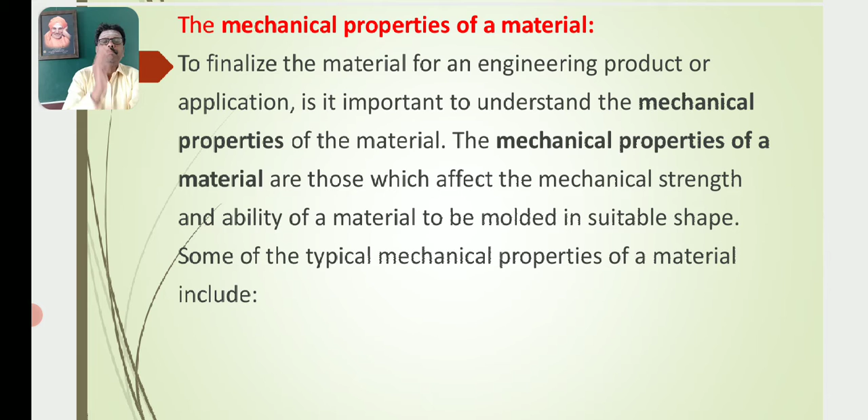What we know is that for an engineering product or application, we must study the mechanical properties of a material. That means to finalize the material of an engineering product or application, it is important to understand the mechanical properties of the materials.

The mechanical properties of a material are those which affect the mechanical strength and ability of a material to be molded in a suitable shape. So what we use in our regular life, some of the engineering equipment or instruments, are all made based on their properties or characteristics, so-called engineering design. So for the purpose of engineering design or engineering applications for various fields, we must study the mechanical properties of the materials.

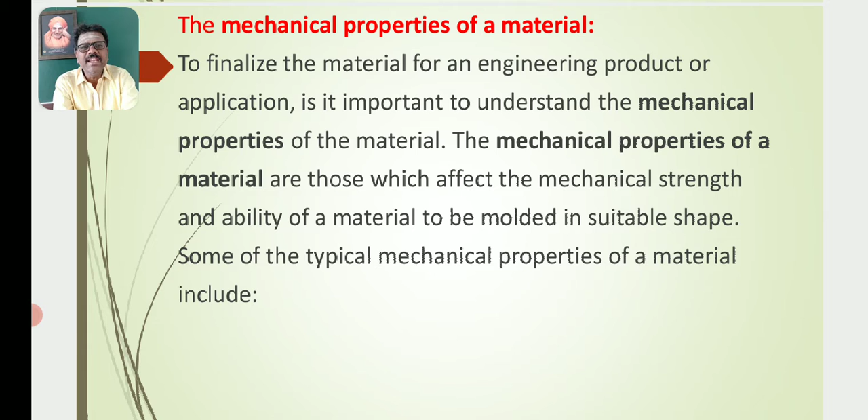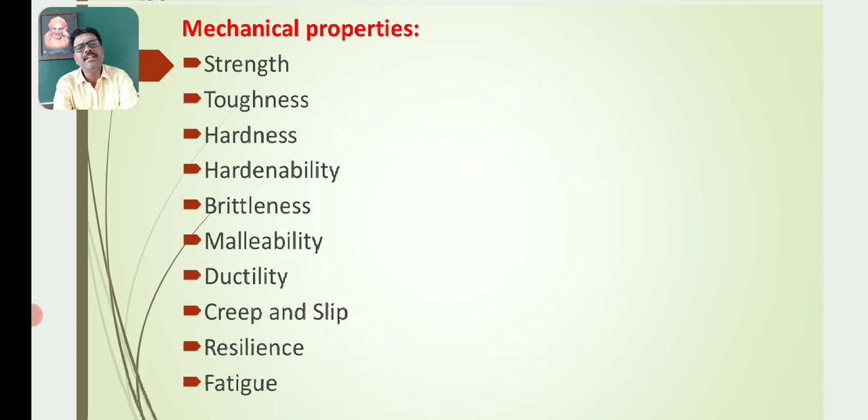So here are given some of the mechanical properties of the materials: strength, toughness, hardness, hardenability, brittleness, malleability, ductility, creep and slip, resilience, fatigue. So these are some of the mechanical properties of the material we need for designing various engineering products or applications.

So now let us discuss material fatigue. What is material fatigue? What are the different types of fatigue? How can fatigue be reduced? What are the different tests of fatigue and all those things? So material fatigue is a phenomenon where structures fail when subjected to a cyclic load.

Suppose the object or any engineering product is subjected to cyclic load, cyclic stress, cyclic external forces; then the engineering product fails to perform its function after several cycles of load or stress or external forces. This type of structural damage occurs even when the experienced stress range is far below the static material strength.

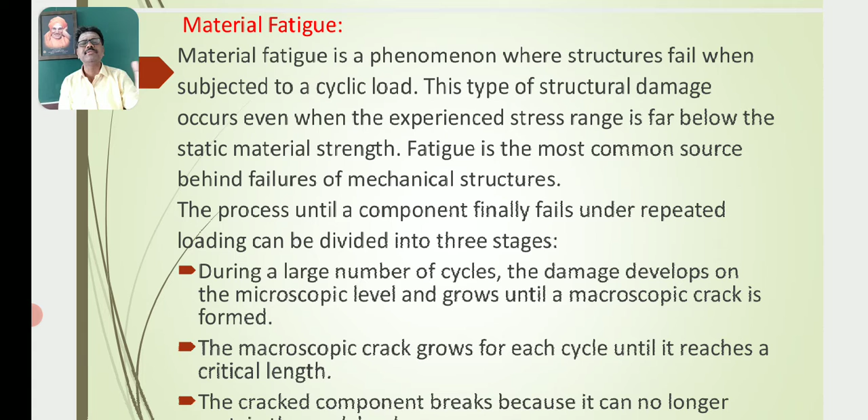So a crack, initially microscopic in level, grows up and becomes a macroscopic crack. Further, the macroscopic crack grows for each cycle until it reaches a critical length; its length goes on increasing. Then the third stage: the cracked component breaks because it can no longer sustain the peak load.

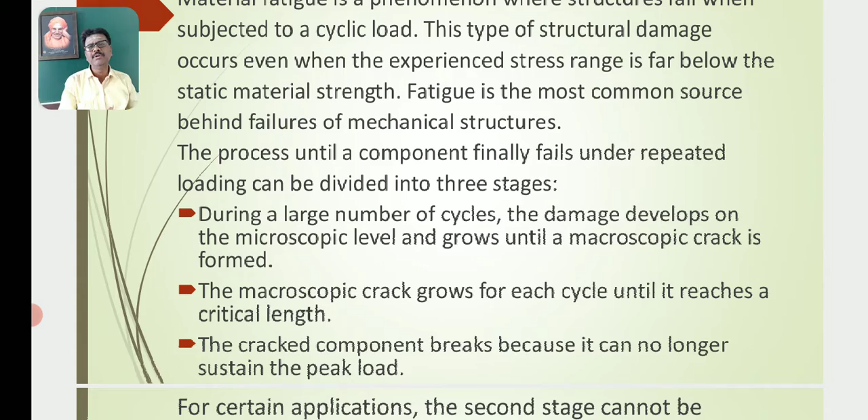So first step, the microscopic level, then it further develops to the macroscopic stage, then the macroscopic crack grows for each cycle until it reaches a critical length. Then further, the cracked component breaks because it can no longer sustain the peak load. So this is how fatigue occurs from the initial stage to the final stage, which has three important stages.

For certain applications, the second stage cannot be observed. A microscopic crack instead grows rapidly, causing sudden failure of the component. So in some cases, in case of some mechanical engines, the second stage cannot be observed because a microscopic crack instead grows rapidly, causing sudden failure of the component.

The details of the last two stages are usually considered within the topic of fracture mechanics. The term fatigue applies mainly to the first stage. There is, however, some overlap between the disciplines, and the measured number of cycles to fatigue often includes the last two stages as well, because the largest part of the component's life is spent before it is possible to observe a macroscopic crack.

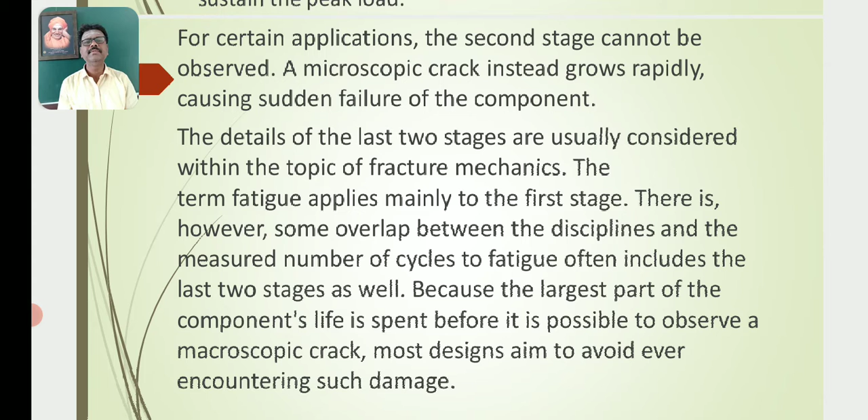Most designs aim to avoid encountering such damage, that means the number of cyclic loads or cyclic stresses which causes fatigue, which causes a macroscopic crack.

So here are given some of the things about fatigue. It is a type of damage or failure in the materials. Fatigue means it is a type of damage or failure in the materials or in some mechanical engines, some mechanical equipments, and so on, which is caused by fluctuating or cyclic stresses.

Usually the macroscopic crack is caused due to cyclic load, cyclic stresses, cyclic external forces acting on it, fluctuating the part of the engine. So because of that, fatigue is caused by fluctuating or cyclic stresses.

Under the effect of fluctuating stress, a point comes where the material is fractured. This level of stress is called fatigue stress and failure is called fatigue failure. Under the effect of fluctuating stress or cyclic stresses, a point comes where the material is fractured. That means this level of stress is called a fatigue stress, and failure is called fatigue failure. This is the third concept related to fatigue.

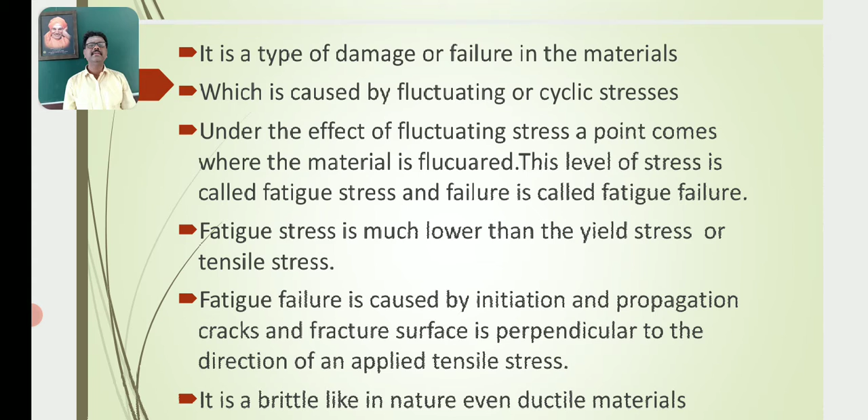So then it is brittle-like in nature, even in ductile materials. Brittle and ductile materials can be studied in the next class. Ductile fracture means the fracture caused after a plastic deformation. The body exhibits the elastic property up to a certain maximum stress. Beyond that point, the body exhibits the property of plasticity. Under that condition, the fracture caused after plastic deformation is known as a ductile fracture.

Brittle fracture means the fracture caused without any appreciable plastic deformation. That is the difference between ductile fracture and brittle fracture. Then in a cyclic process, three different stress-time modes are possible. The stress can be axial, tension-compression, bending or torsional in nature.

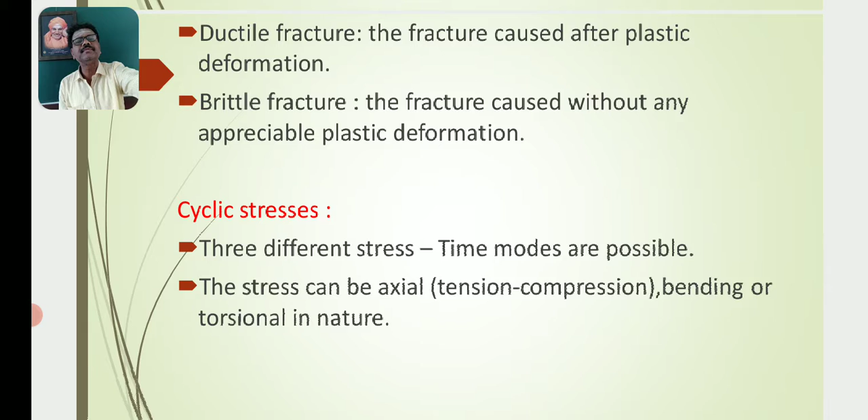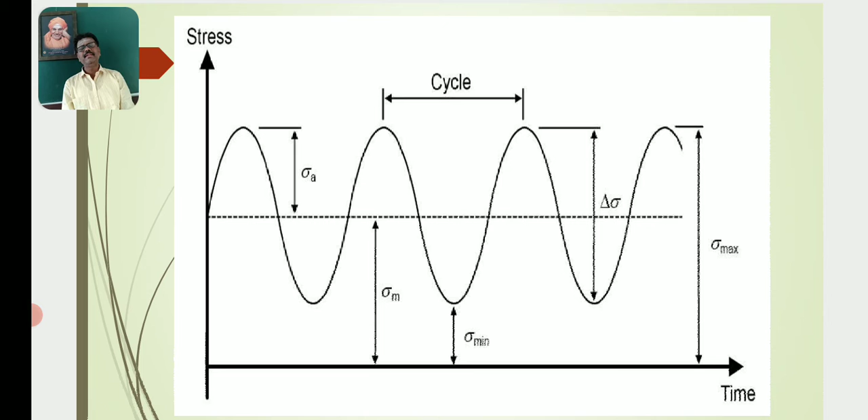So you see the stress versus time graph, that is the sinusoidal graph that indicates the cyclic load or stress or external forces acting on the material, where sigma max indicates the maximum stress acting on the surface, sigma min indicates the minimum stress acting on the surface. Sigma maximum means the maximum cyclic stress or maximum cyclic load acting on the surface of the material, sigma minimum indicates the minimum stress acting on the surface.

So reversed stress cycle. Tensile stress applied on a sample and released, compressive stress applied and then released. For example, bending load applied to a rotating shaft, axle of vehicles. This is called a reversed stress cycle, type A mode. In this case, a tensile stress is applied on a sample and then released, then a compressive stress is applied, then again released. The bending load applied to a rotating shaft, axle of vehicles, are good examples of a reversed stress cycle.

Then a repeated stress cycle, this is called type B mode. The maxima and minima are asymmetrically related to the zero stress level. It is termed as a repeated stress cycle. For example, the cycling load or cycling stress on a cantilever beam, depending upon the residual stresses inside the materials. This is the example for a repeated stress cycle.

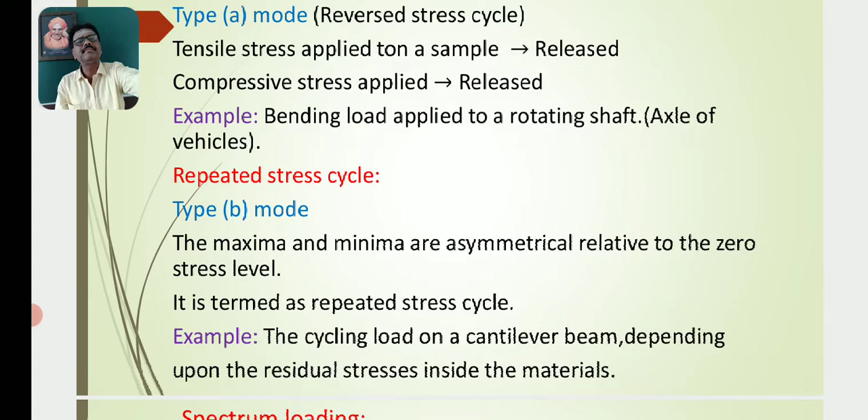Now third, type C mode, a spectrum loading. The stress level varies randomly in amplitude and frequency. That mode is called type C mode or spectrum loading. Example: suspension wires in a railroad bridge, where the stress changes randomly in amplitude and frequency. Wires carry the weight of the bridge under static tensile load, with additional load when a train is on the bridge.

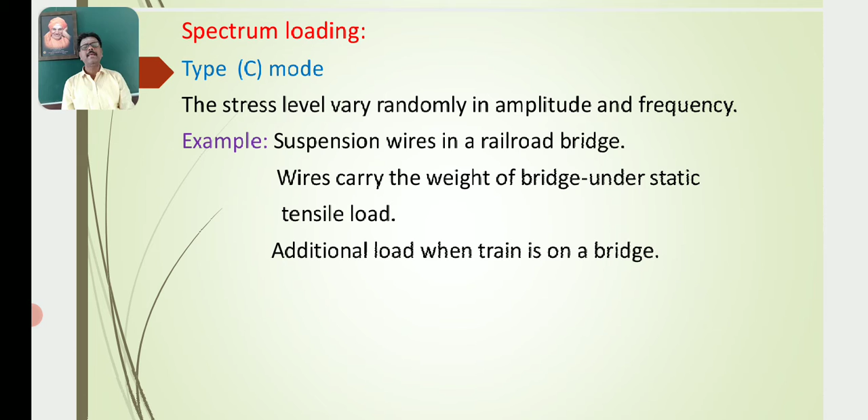So the suspension wires in a railroad bridge undergo cyclic stress, meaning the stress acting on the wires varies randomly in amplitude and frequency. Such a mode is called type C mode. That type of loading is called spectrum loading.

So now let us discuss the SN curve. The specimen is subjected to cyclic stress at a large maximum stress amplitude. This large maximum stress is usually taken as 2/3 of the static tensile strength. Finally, the number of cycles to failure is counted.

Then other specimens of the same material and dimensions are taken and subjected to the same procedure, but at progressively decreasing maximum stress amplitudes. Then data are plotted as stress S versus the logarithm of the number of cycles to failure for each specimen.

So here the SN curve means stress S versus the logarithm of the number of cycles of cyclic load or cyclic stress. Now the specimen is subjected to the cyclic stress or load at a large maximum stress amplitude. This large maximum stress is usually taken as 2/3 of the static tensile strength. Then finally the number of cycles to failure is counted.

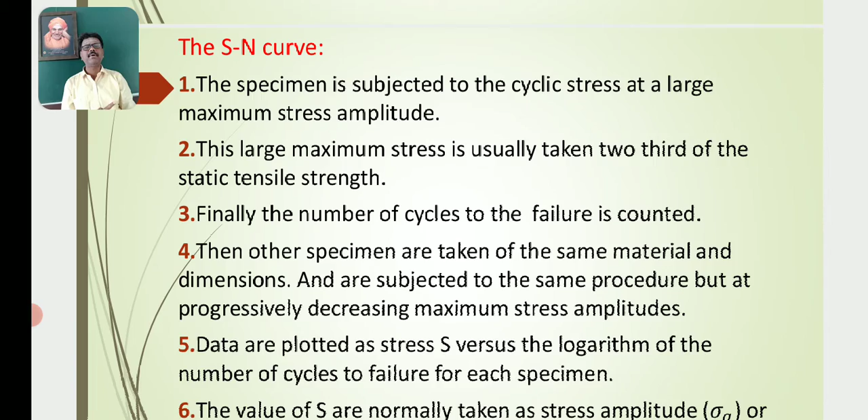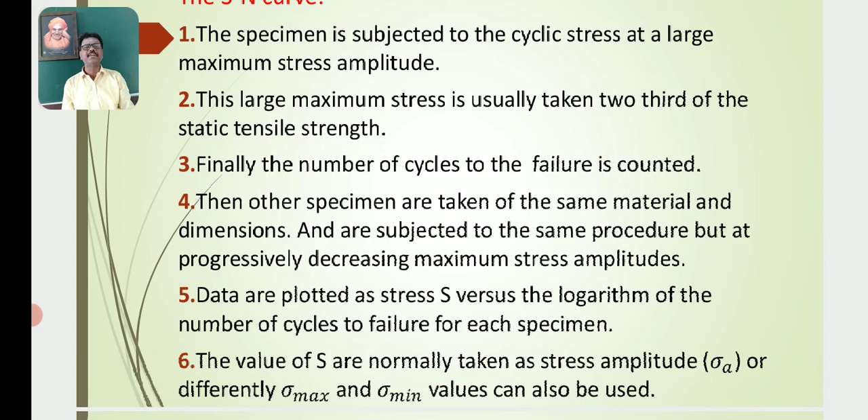Then other specimens of the same material and dimensions are taken and subjected to the same procedure, but at progressively decreasing maximum stress amplitudes. Then the data are plotted as stress S versus the logarithm of the number of cycles to failure for each specimen. The value of S is normally taken as the stress amplitude, or alternatively sigma maximum and sigma minimum values can also be used.

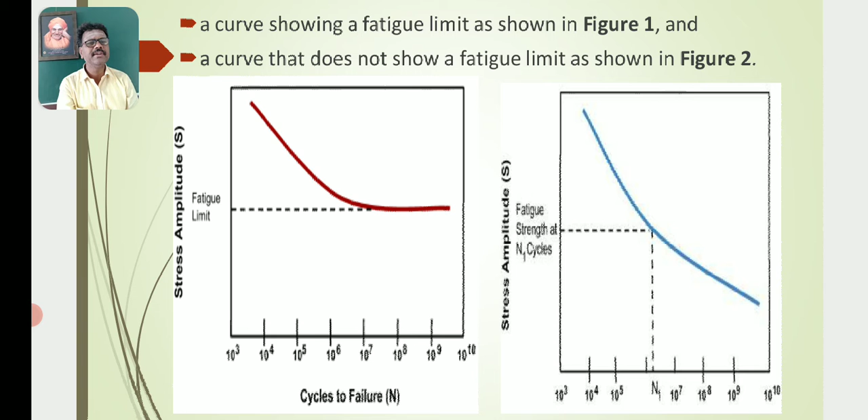Figure 1 indicates a curve showing a fatigue limit, and figure 2 a curve that does not show a fatigue limit, as shown in the second diagram. That means the variation of stress amplitude versus the number of cycles, or number of cyclic loads applied to the surface of the materials.

So then what are fatigue limits? For some ferrous and titanium alloys, the SN curve becomes horizontal at higher N values. This is called the fatigue limit or endurance limit. This fatigue limit actually represents the maximum value of cyclic stress below which fatigue will not occur for an infinite number of cycles.

So here fatigue limit means for some ferrous and titanium alloys, the SN curve becomes horizontal at higher N values. This is called the fatigue limit. Then what is the fatigue limit? The fatigue limit actually represents the maximum value of cyclic stress, or cyclic load or cyclic external force per unit area, below which fatigue will not occur for an infinite number of cycles.

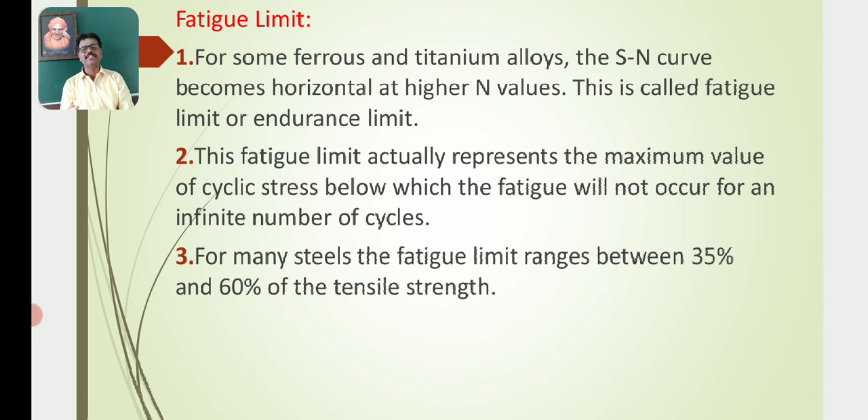For many steels, the fatigue limit ranges between 35% to 60% of the tensile strength. So here is the comparison between the fatigue limit and the tensile strength of the same material, with one example given, steel. For many steels, the fatigue limit ranges between 35% to 60% of tensile strength. So the fatigue limit range is different for different materials.

So now let us discuss fatigue strength. Many non-ferrous alloys like aluminium, copper, and magnesium do not have a fatigue limit. Their SN curve continues its downward trend with increasing number of cycles.

Thus fatigue is inevitable for these alloys regardless of the amplitude of the stress. The fatigue response of these materials is specified by fatigue strength. It is defined as the magnitude of the stress at which a failure will occur for some specified number of cycles.

Fatigue strength is defined as the magnitude of the stress at which failure will occur for some specified number of cycles. In case of non-ferrous alloys, the fatigue failure occurs when the number of cycles must be approximately equal to 10⁷.

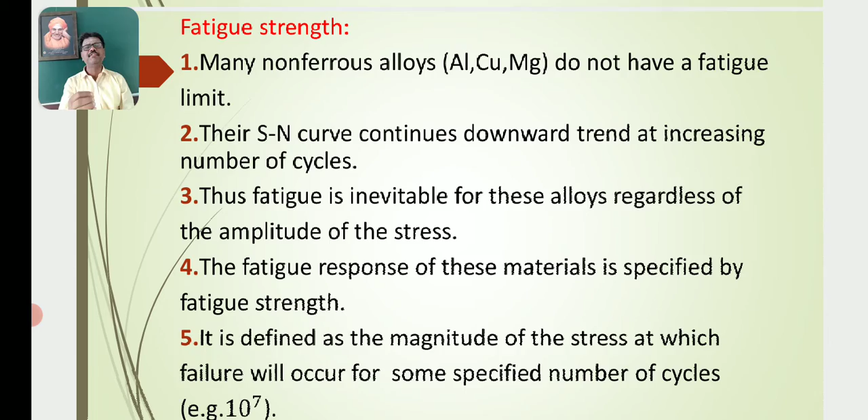Now let us discuss the characteristics of fatigue. In metals and alloys, the process starts with dislocation movements, eventually forming persistent slip bands that nucleate short cracks.

Fatigue is a stochastic process, often showing considerable scatter even in controlled environments. The greater the applied stress range, the shorter the life. That means the greater the applied stress range on the object or surface of the material, the more likely a failure occurs in a short range, meaning they have a short lifetime.

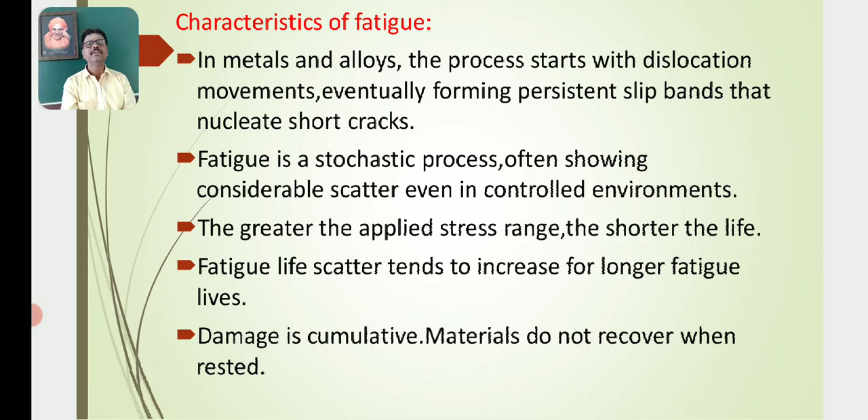Fatigue life scatter tends to increase for longer fatigue lives. So damage is cumulative; materials do not recover when rested. These are the characteristics of fatigue.

Fatigue life is influenced by a variety of factors such as temperature, surface finishing, microstructure, presence of oxidizing or inert chemicals, residual stresses, and contacts. That means the fatigue life of a substance or material is influenced by these factors: temperature, surface finishing, microscopic structure, presence of oxidizing or inert chemicals on the surface, and residual stresses on contact fretting.

So these are the factors which are affecting the fatigue life.

Some materials, such as certain steel and titanium alloys, exhibit a theoretical fatigue limit below which continued loading does not lead to structural failure. In nature, these materials can exhibit only a theoretical fatigue limit; they cannot exhibit a practical fatigue limit. Even below that theoretical fatigue limit, continued loading does not lead to structural failure. These are some of the characteristics or properties of fatigue.

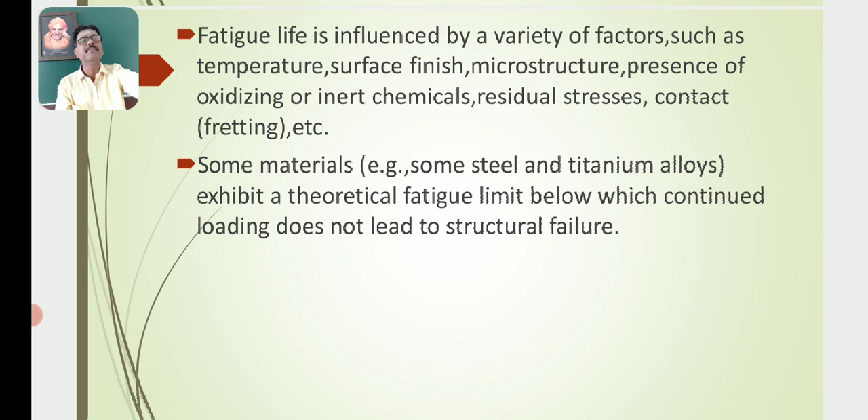The theoretical strength of a crystalline material, sigma theoretical, is equal to the square root of Y gamma by r naught, where Y is the Young's modulus of the material, gamma is the surface energy, and r naught is the equilibrium distance between atomic centers.

Sigma elliptical crack is equal to sigma applied into 1 plus 2 root of a by rho, which is equal to 2 sigma applied root of a by rho, where sigma applied is the loading stress, a is the half length of the crack, and rho is the radius of curvature of the crack tip.

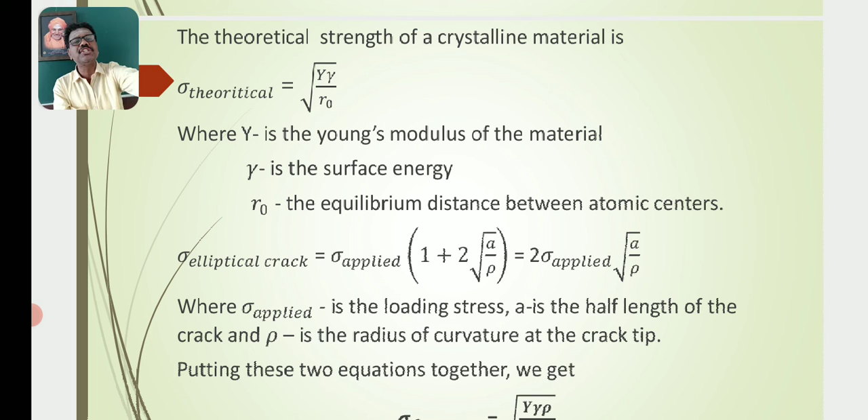Putting these two equations together, we get sigma fracture, which is equal to root of Y gamma rho by 4a r naught.

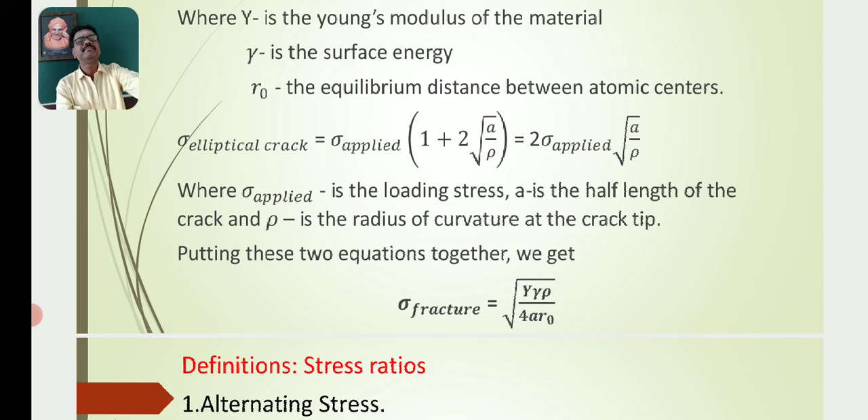Here are some definitions related to fatigue fractures: alternating stress, mean stress sigma m equals sigma maximum plus sigma minimum by 2. For a pure sine wave, mean stress equals 0. Stress ratio R equals sigma maximum by sigma minimum. For sigma m equal to 0, R equals -1. Amplitude ratio A equals 1 minus R by 1 plus R.

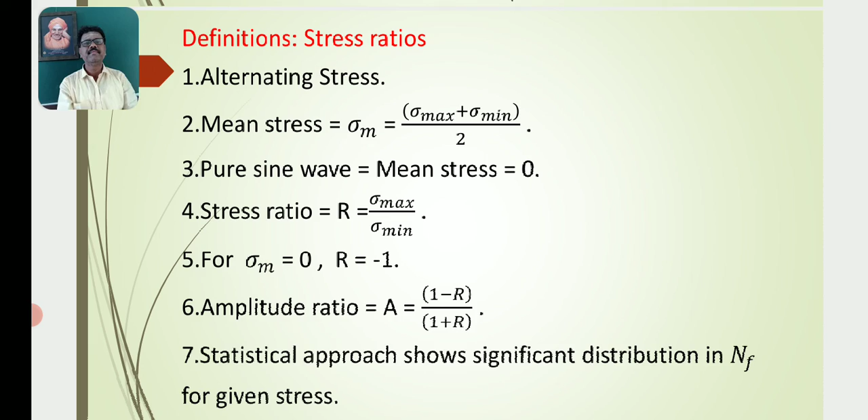A statistical approach shows significant distribution in NF for a given stress. So these are some of the concepts for fatigue.

Look here, they give some diagrams related to fatigue. See the first diagram, showing what fatigue occurs in that case, then the second, third one, then in the rod, then the wheel - different materials. That means the fatigue which occurs in different materials. It is the number of cycles to cause failure at a specified stress level.

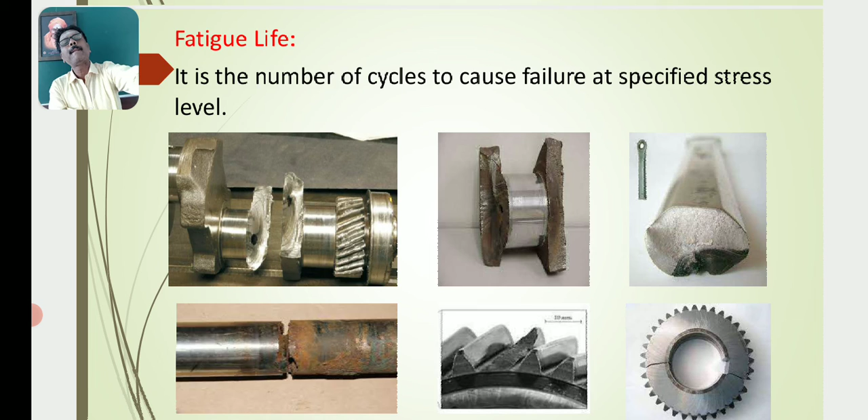In this case we discussed fatigue - the mechanical properties of materials, list of mechanical properties, fatigue, different stages of fatigue, how fatigue occurs, how fatigue failure appears in the parts of a machine, examples for fatigue, the SN curve, the significance of stress versus number of cycles curve, and some definitions needed for the study of fatigue: fatigue strength, fatigue limit, the characteristics of fatigue, and so on.